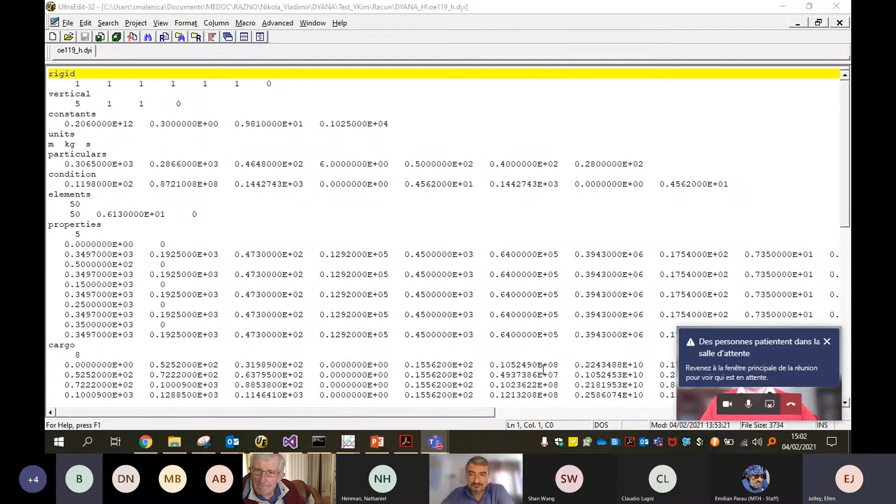Let me introduce our speaker today, Sime Malenica. He has a naval architecture degree from University of Zagreb, and obtained his PhD in hydrodynamics in '94 from Paris 6 University. After graduation he joined Bureau Veritas, a French classification society, where he is still employed. He has been head of the hydrostructure section team in the research department for a long time, and from 2008 he is deputy director of the research department at Bureau Veritas. His main field of research concerns different aspects of fluid structure interaction. He leads several national and international research projects on these topics. He works in both theoretical and practical aspects of ship and offshore hydrodynamics. He has published 150 papers in international scientific journals and specialized conferences. He is associate professor at the Faculty of Mechanical Engineering and Naval Architecture at the University of Zagreb, and from 2016 he is corresponding member of the Croatian Academy of Sciences and Arts. I believe these are great achievements and recognition of Professor Malenica's contribution to the field of research.

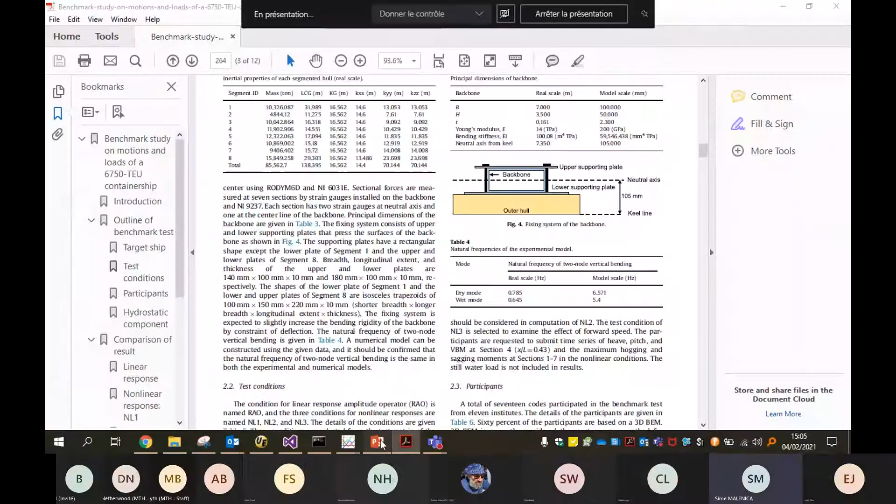But before I switch off my microphone, could you please share your slides? Yes, yes, can you see it? Yes, I see it, perfect. Do you see just the presentation or? No, now I see, the previous one was the right one. Yeah, that one, yes.

Okay, yes please start. Thank you Sasha, thank you for this introduction. I'm glad to be able to speak at this series of seminars. This is work which has quite big practical importance, and it's kind of a starting step toward the solution, hopefully in the near future.

The work was done in collaboration with the University of Zagreb, Bureau Veritas, and University of East Anglia, Professor Korobkin and Tanya. So we all participated in some way.

This is the content of the presentation. I will say first something about why we are doing all this. Then I will briefly present the analytical solution, which was provided by Tanya and Sasha, the definition of the test cases which we chose to work on, describe the numerical approach and the numerical models which were used, and then present and discuss the results.

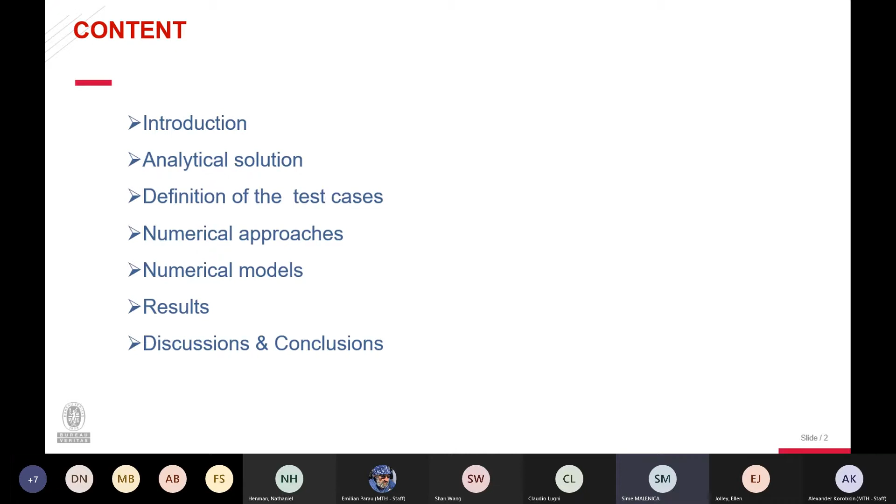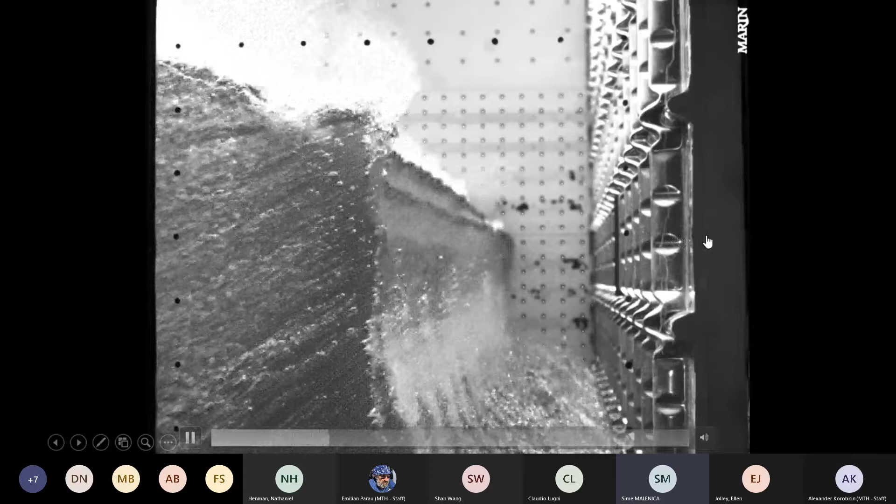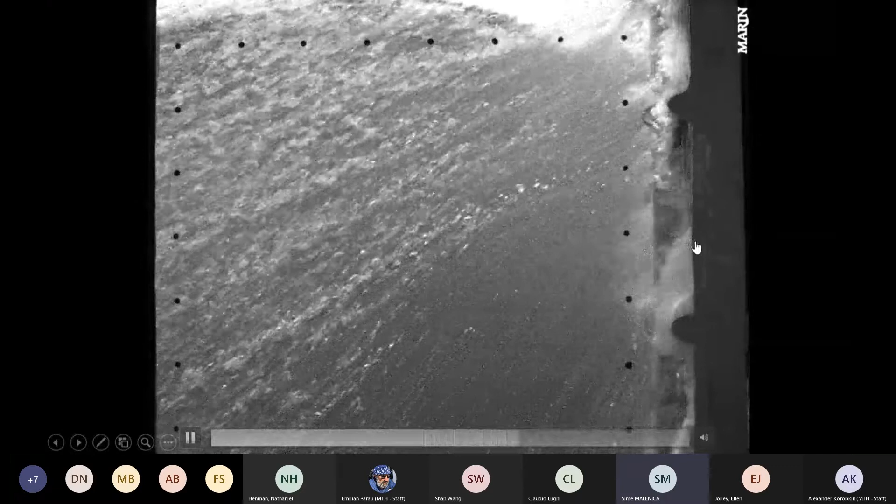This is the context where the work we were doing is meant to be applied. So these are all sorts of impact situations. These are some videos of large-scale tests on sloshing impact on the corrugated containment system. This is just to show how complex the problem is, and what we want to know is the stresses in the structures at the end when these impacts occur.

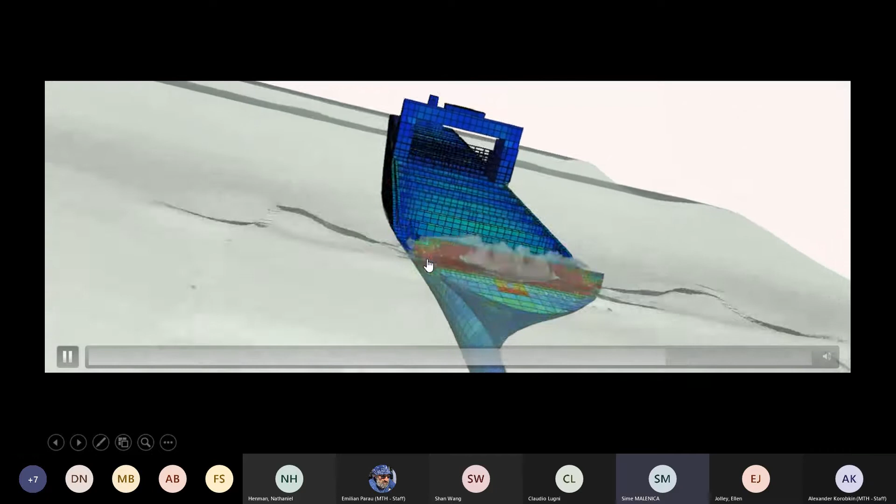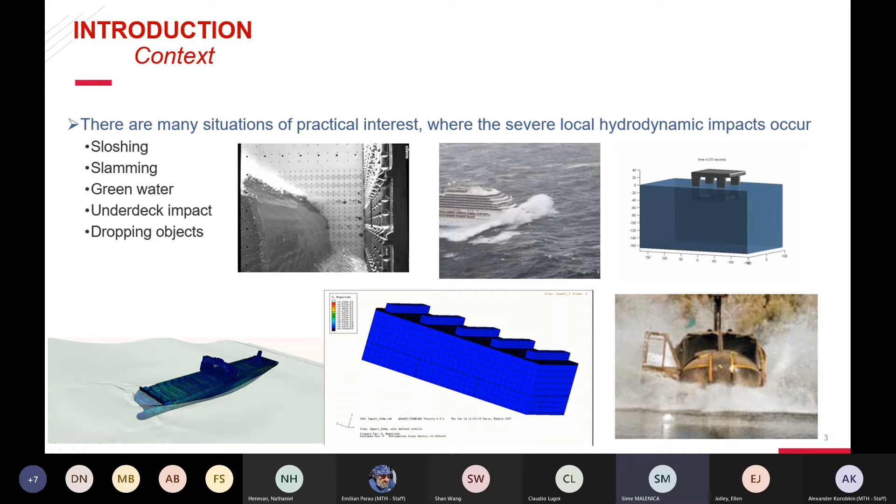Another type of condition where this can happen is what we call green water impact on the deck superstructure. Another type of thing is impact under deck on the semi-submersible, and all sorts of impacts where we have very strong hydrostructural interactions and very large pressure forces exerted on the structure.

Physically the problem is complicated because many physical effects are involved. On the fluid flow side, sometimes we can consider flow as incompressible, sometimes compressible - compressibility can matter. On the structural side, we prefer to work with linear type structural response, but that's not always possible, we should sometimes involve some nonlinear behavior of the structure. On the interaction side between fluid and structure, we have several possibilities: either fully coupled, what we call hydroelastic, which is very complex and we try to avoid it, or quasi-static, or a mix of quasi-static and dynamic, which we call quasi-dynamic, in which we consider just the structural dynamics.

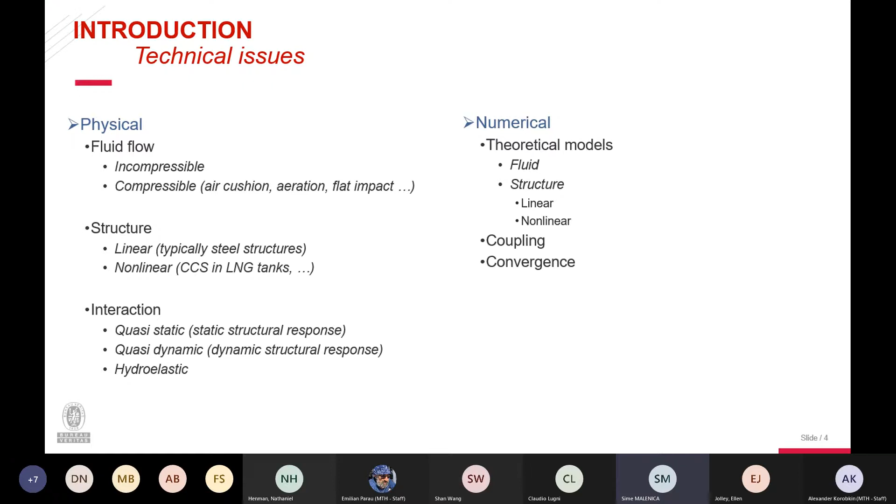On the numerical side, the theoretical models on both sides, fluid and structure, can be very complex, as well as the coupling procedure, which can also be quite complex. And when we talk about the purely numerical method, we have some convergence issues. So the objective of this study was to investigate the possibility of coupling CFD and finite element.

CFD for hydrodynamic loading and finite element code for modeling the structural response. On the hydrodynamic side, we tested several methods, what we call the ghost fluid method or the classical method. We tested the simulation, compressible and incompressible.

On the structural side, we have an in-house beam model, which we call Dyana2, which is used in several ways. That was very helpful because we have full mastery of this software, since it was written in-house.

On the coupling side, we have two types of approaches. One which I call direct, which means at the level of the finite elements, and we have the modal approach, which consists in the coupling through modal superposition. So in all cases, the Dyana2 beam model was used as the structural solver.

But what we should understand is that this coupling is a general coupling, because everything is done so we can easily replace Dyana2 with software like Nastran, Abaqus, or whatever.

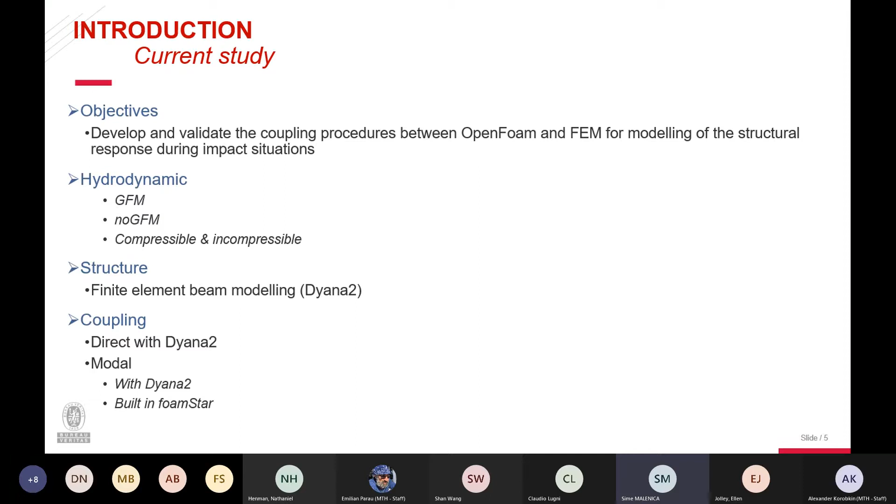So an analytical solution was provided by Tanya Khabakhpasheva and Professor Korobkin. I will just briefly explain what is done there, in order to better understand what we are comparing.

So the coupling is done under Wagner assumptions, and the structural model is the Euler Bernoulli beam with simply supported boundary conditions. The coupling procedure is based on modal decomposition.

What is interesting to say here is that within the approach they use, the pressure is not explicitly evaluated. That means we do not really need to talk about pressure even. But in practice it happens that we talk only about pressures. When hydroelasticity matters, we should not talk that way. That's one of the points we are willing to raise with this work.

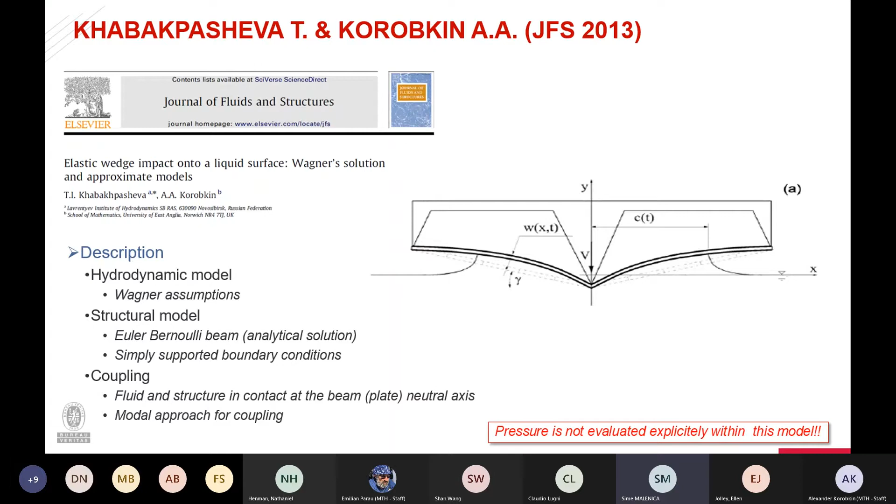So the Wagner model, briefly, is a simplified linearized model in the sense that we linearize the free surface condition, but it is in fact non-linear because the position of the free surface is not known in advance. There is a huge body of theoretical work done in the past by many authors, in particular Sasha.

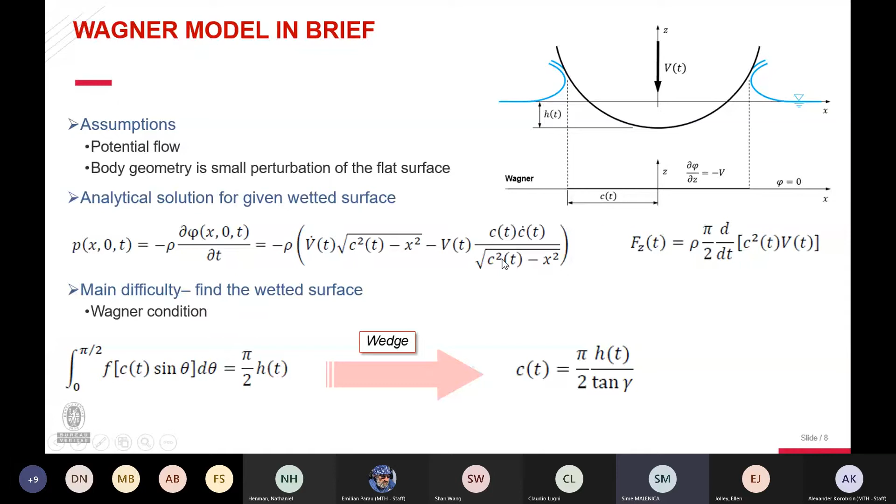And we end up with this kind of expression for pressure, which is singular at the contact point. So we have infinite pressure at the contact point, which is physically not acceptable, of course, but that's the mathematical model. We always have some drawbacks due to the assumptions we made when building the model.

So the maximum pressure can be obtained, and the distribution close to this contact point can be obtained using some quite non-trivial matched asymptotic expansion analysis, which allows you to properly couple the external and internal solutions and give a finite pressure close to this contact point.

So in black line here, we use the solution which was proposed by Professor Faltinsen, and this corrected distribution is shown in black line.

So the red line is something which we would obtain using the pure original Wagner model. So the critical quantity in all this analysis happens to be the velocity of the expansion of the wetted surface, which is denoted here by C dot.

And we can see that maximum pressure is proportional to the square of this velocity, and this expansion velocity is proportional to the impact velocity and inversely proportional to the tangent of the wedge angle, which means as we go closer to flat impact, this pressure can take huge values.

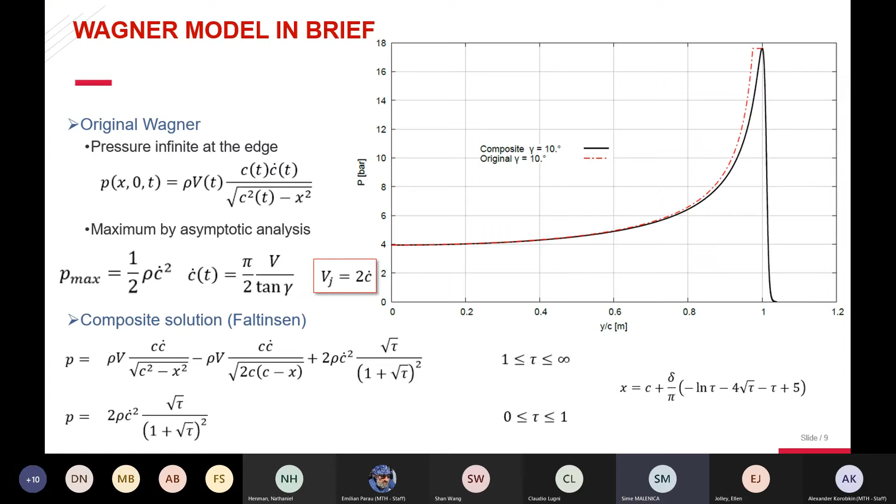But as we will see, this huge value of pressure does not mean that the structural response will be enormous, because this pressure will be absorbed by the dynamics.

So what is important to understand about the Wagner model is that one of the main points of this presentation is that we should not use just maximum pressure as the quantity which is relevant for structural response.

So you can obtain the same maximum pressure with very different impact conditions. You see the impact velocity change from 3 to 17 meters per second, and if you change even slightly the dead rise angle, you can achieve the same maximum pressure but a very different pressure distribution. So what matters for the structural response is the pressure distribution, not just the local maximum pressure.

So you can see this, what I note: WQS is the quasi-static structural response, meaning just applying this pressure on the finite element model. You can see that the response can be very, very much different for the same maximum pressure, meaning that knowing the maximum pressure is not enough.

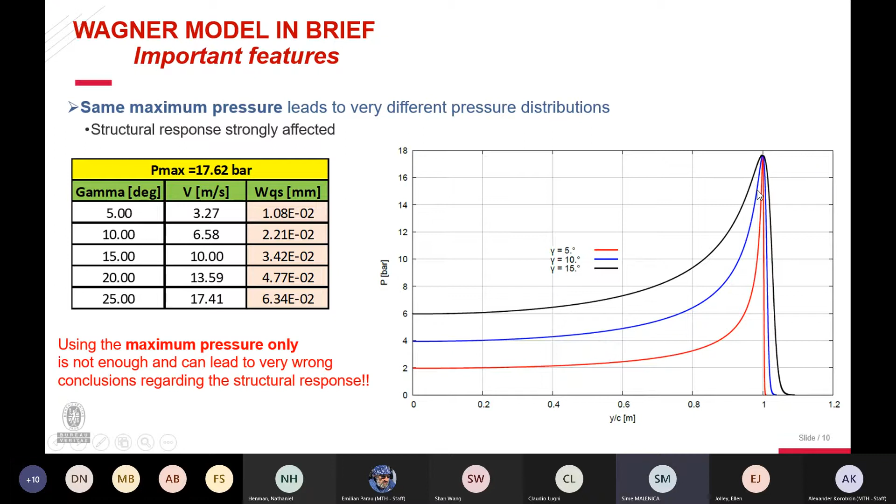What is also important to understand is that if you have one constant velocity and you slightly change the impact conditions, meaning the angle, your pressure changes dramatically, as well as the quasi-static structure response. So using the impact velocity only, we cannot correctly assess the structure response.

What we are interested in at the end is the structure response. The pressure itself is not so much interesting. It's good to know that it is sharp, but at the end what we are interested in is the structure response.

So this type of pressure, even if this is an analytical model, we can say it is just a model. But when you do model tests in practice for very small dead-rise angle, you can obtain extremely large pressures. There was a good paper by Faltinsen in which he showed that even slightly changing the impact conditions, you can have pressures locally up to 50, 100 bars. That's what we measure. But the point is that the pressure is not the only quantity we should look at.

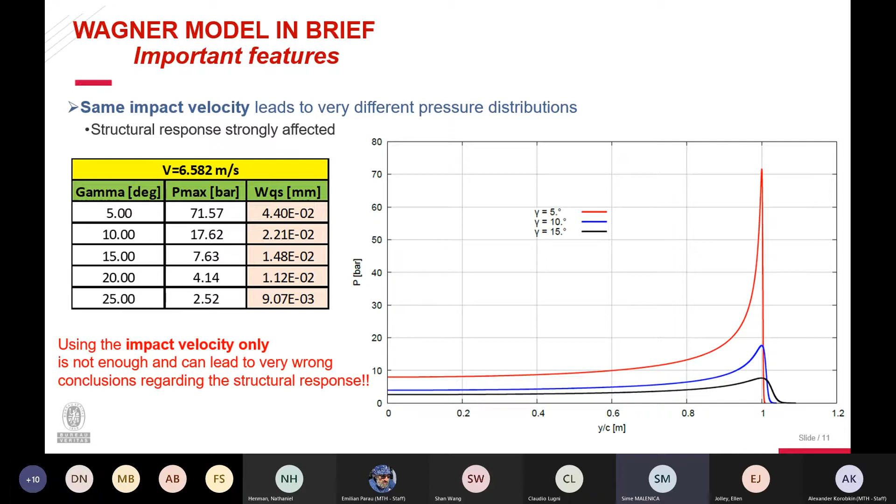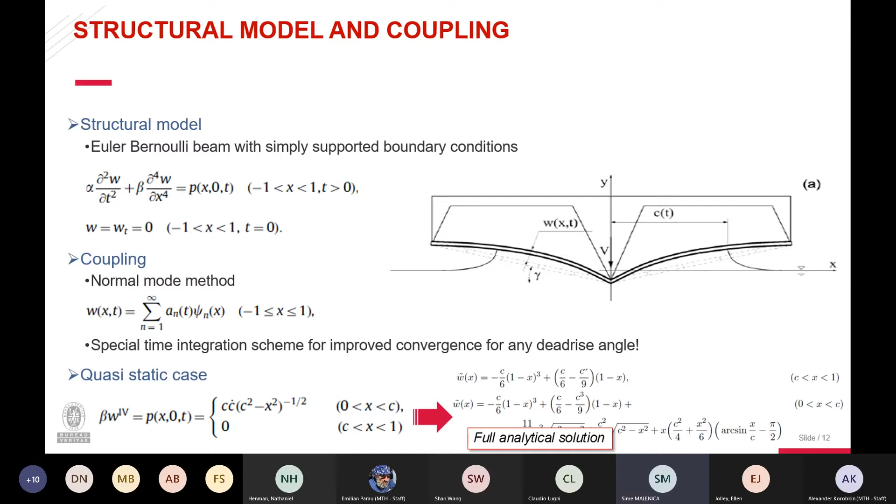So this is the principle of the coupling method which Tanya and Sasha used. I will not spend too much time on this. It's a full analytical solution based on normal mode method, so it's very fast converging and there are no numerical issues. Everything is properly calculated within the theory which we adopted at the beginning.

So what we did in this study, the question we asked ourselves is: can we use a purely numerical approach, which in our case means foamStar or OpenFoam and finite element coupling, to model this kind of situation? Why do we do this? Because in practice, when we have impacts, as I showed in the introduction, we never have a kind of very clean academic wedge impact problem. It's always something much more complex.

And when the geometry of impact and conditions become complex, we can no longer reasonably use the simple analytical approach. So we have to deal with more complex numerical methods, like this CFD method based on OpenFoam. It's more costly, of course, than the analytical approach: analytical takes a few milliseconds, and CFD takes a few hours. But we have no choice, that's the point.

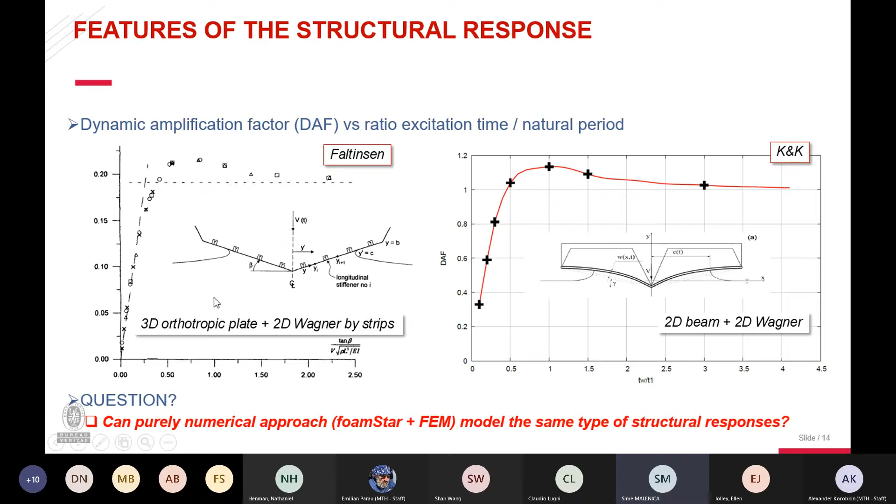What is important to understand is that we have three different regimes for which we need to do the simulations. And these regimes are, from a numerical point of view, very much different. So a different strategy of coupling should be used.

So this is the dynamic amplification curve, where we identified three typical regimes: the impulsive response, when very short — on the horizontal axis there is the ratio between the duration of the loading and the natural period. So for a very short duration of the loading, we have impulsive response. When the duration of the loading is comparable to the natural period, we have dynamic amplification.

And where the loading is quite slow, we have quasi-static response, which is the response we would like, and in practice we would like to use most often because it's the simplest one. In this quasi-static approach, you can simply calculate the pressure and apply it on the structure, and you will have good results. However, for these impact problems, as we will see, these dynamic and impulsive regimes are more relevant.

So how to choose these calculation points? We use this analytical solution to choose the calculation points for the numerical analysis. We have chosen the plating which is physically close to the plating of the one container ship on which we had some problems. These are the characteristics of the steel: the length of the plate is 0.8 meter, and then by playing with the different impact conditions, we can identify different regimes and place ourselves at different points on this curve.

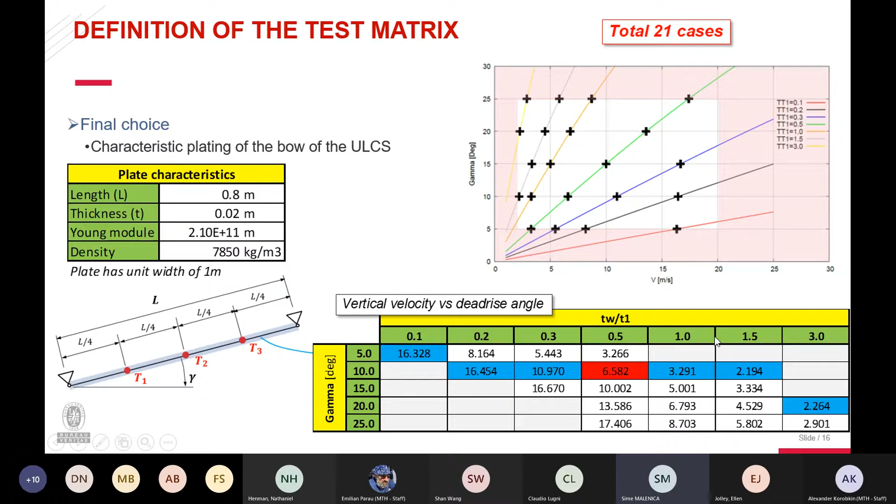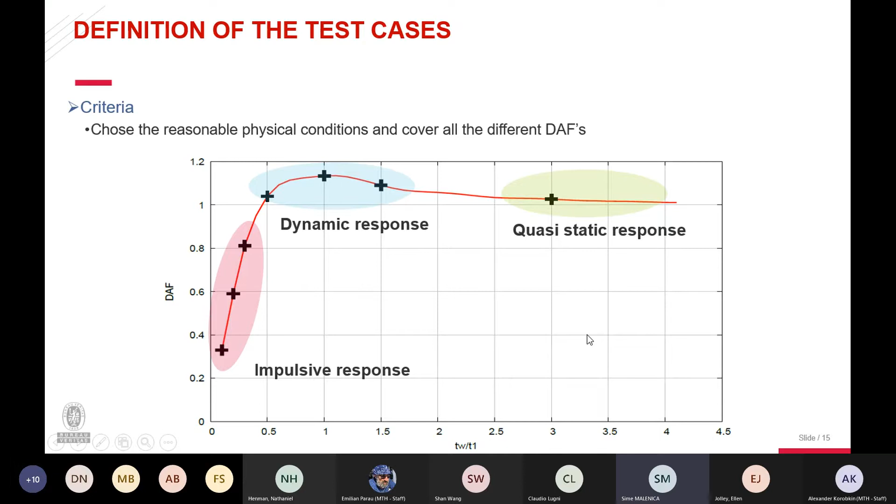You see here 0.1, 0.2, 0.3, 0.5, 1, 1.5, and 3 — these are the points on the horizontal axis. When we have 0.1, we are close to the impulsive response. When it's 1, it is dynamic, and when it's larger than 2 or 3, it is quasi-static.

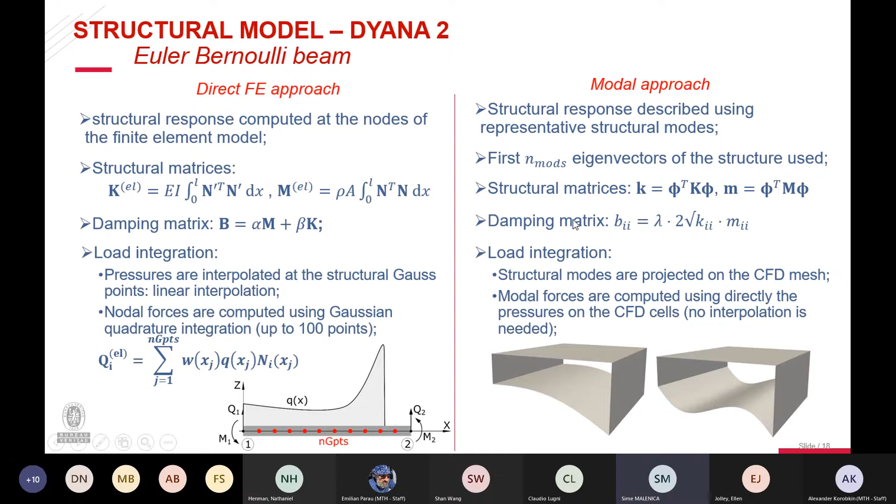On the numerical side, we used a structural model based on the Euler Bernoulli beam, which was recently revisited and redeveloped, so that we have something to play with, where we can change every detail of the modeling and properly extract any information we need — both for the direct finite element approach and at the level of the modes. It's classical dynamic structural analysis, but fully mastered by our team.

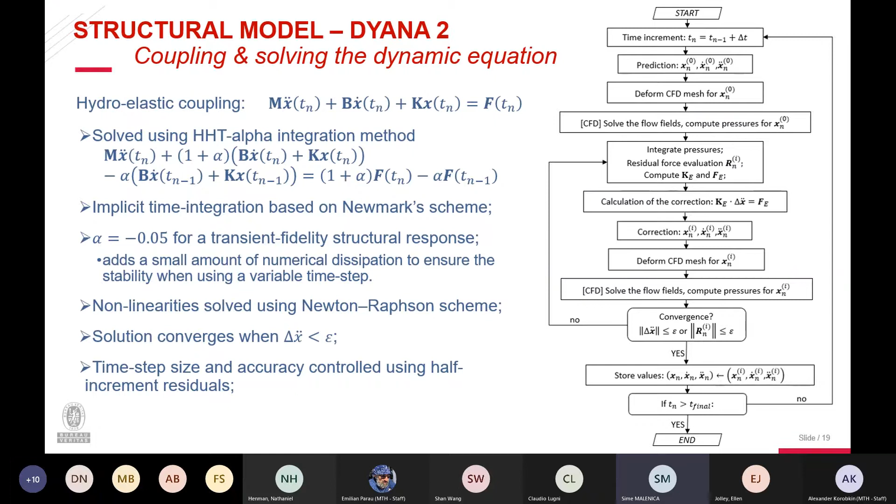Once you have your structural model correctly mastered, you need to interact with the loadings on the loading side. A quite general interaction scheme was built by my colleague and postdoc from University of Zagreb, in which the interaction between the structure response and the dynamic loading was done through an iteration procedure, which converges properly. Most often, in some cases, we need to adjust some things — it depends on which regime we are placed in.

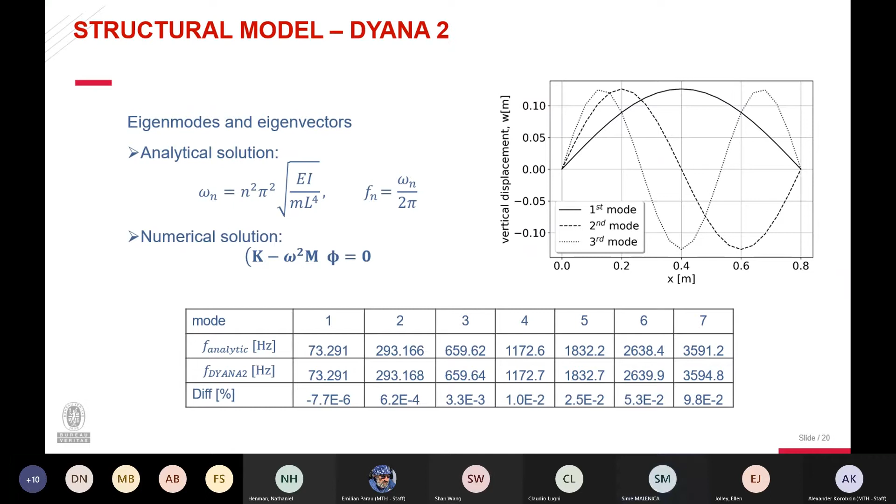So these are the natural modes and the characteristics of the finite elements — nothing special, that's what we have as a result of the structural analysis. This can also be analytical, but we did it on purpose using the numerical solution, because our objective is to couple later on this OpenFoam and classical generic structural software like Nastran, Abaqus, or whatever.

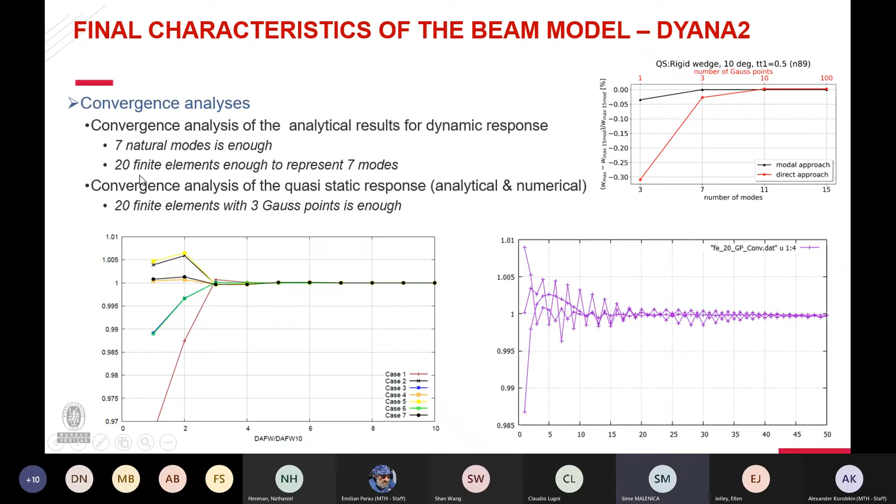Before choosing the characteristics of the structural model, we did some analysis on the convergence of the response based on the number of elements and the number of mode shapes, just to be sure that our structural response will converge at the end. So at the end, we chose 20 finite elements along the beam for the direct coupling, and we used 7 natural modes for the modal coupling. So this is a few details about FoamStar.

Those who know me know that I'm not an expert in CFD, but I understand that we have no choice in some situations — we have to do the CFD. There are some experts on CFD who have quite different views on the different strategies employed when you need to capture the free surface. That's one of the main problems, not only in CFD but in general in dynamics.

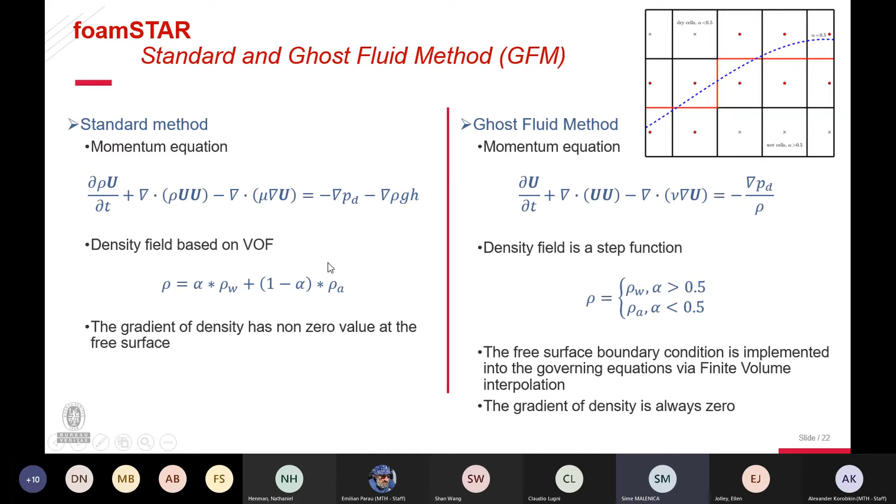There are two methods: the standard method, available in classical OpenFoam, and the newly developed ghost fluid method, developed at University of Zagreb and implemented by Ino within this work. I will not say too much about the details because I don't really fully understand them, but just to say there are different strategies.

These are the meshes on which we also did a convergence study. In CFD, it is fundamental to do the convergence study, because otherwise you cannot trust the results at the end. So we did several meshes — N64, 89, 133, 200, and 300, meaning the number of cells along the wedge. This is just to show the mesh.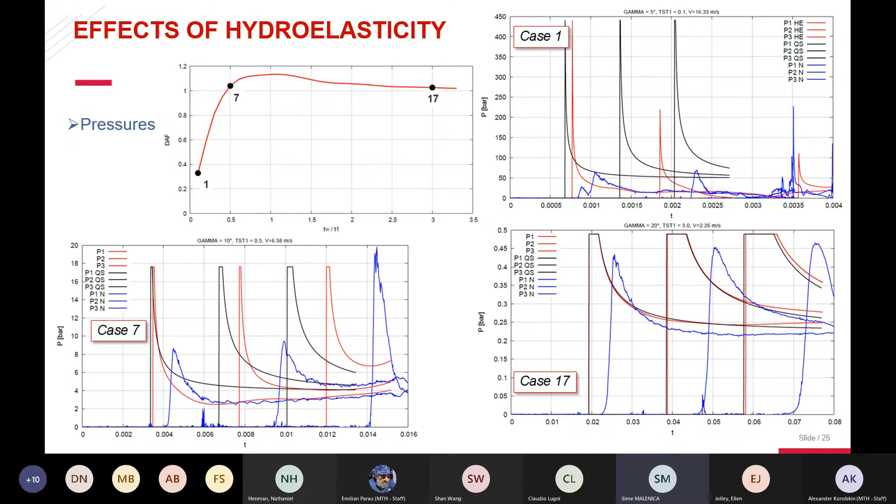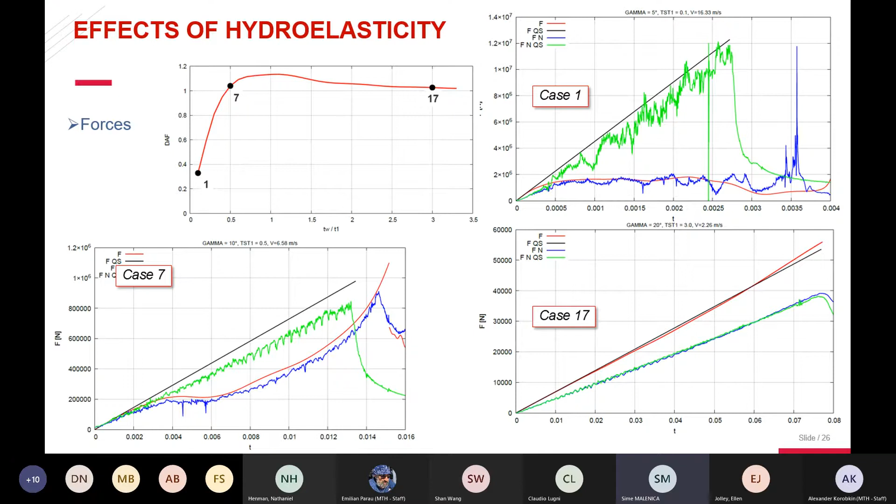So the comparisons between analytical and numerical results are on this graph. It's good to see that even for small dead-rise angle, the CFD obtains quite reasonable results, even if they need to be filtered at the end, because there is quite a lot of oscillation in terms of the CFD loading and the response.

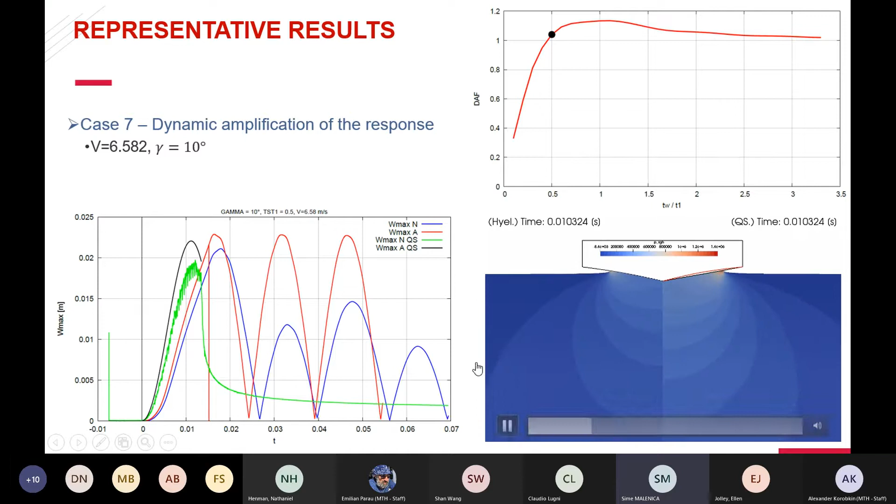So this is the case where you have the kind of dynamic amplification. In this case, we need to take into account the dynamic amplification, but the difference between quasi-static and dynamic is not so huge. These dynamic amplifications go up to 1.15 or 1.18, which is not huge. If we use quasi-static simulation here, we will miss maybe 20% of the response.

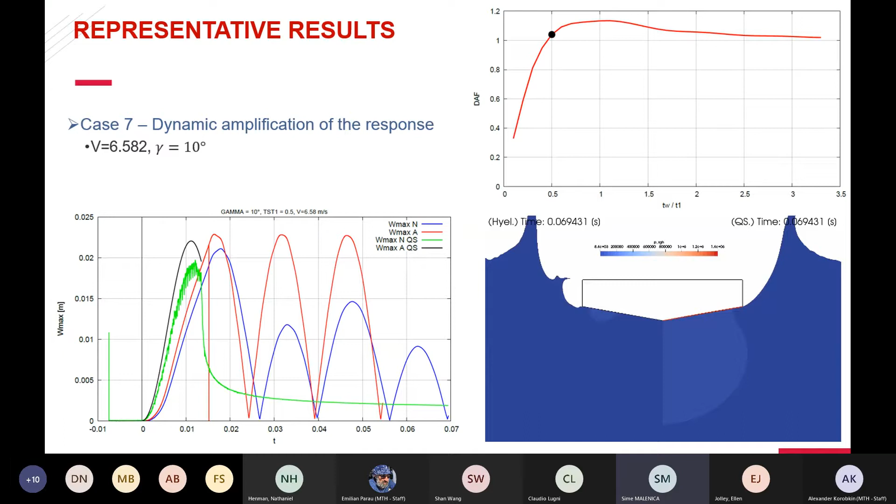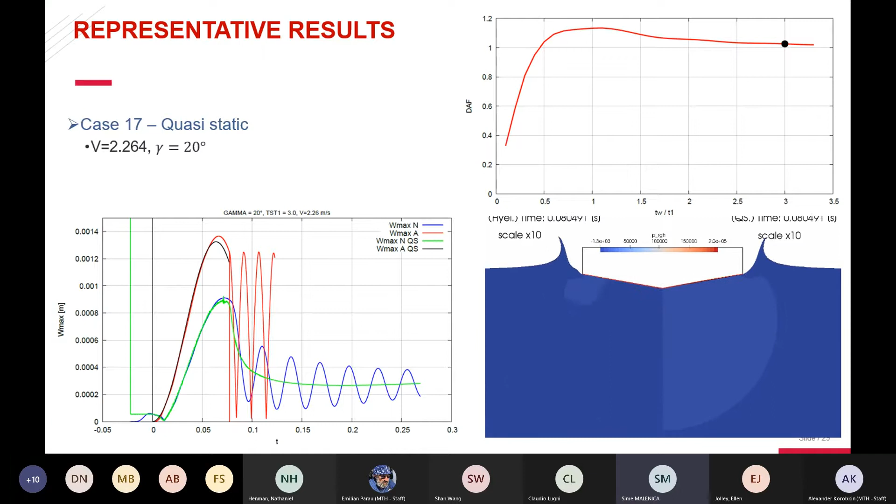This is the summary of all 21 cases and all types of simulations we did. Without going much into the details, the idea is to show that using the hydroelastic coupling method between the purely numerical CFD method and the structural finite element method, we can properly capture this dynamic amplification curve.

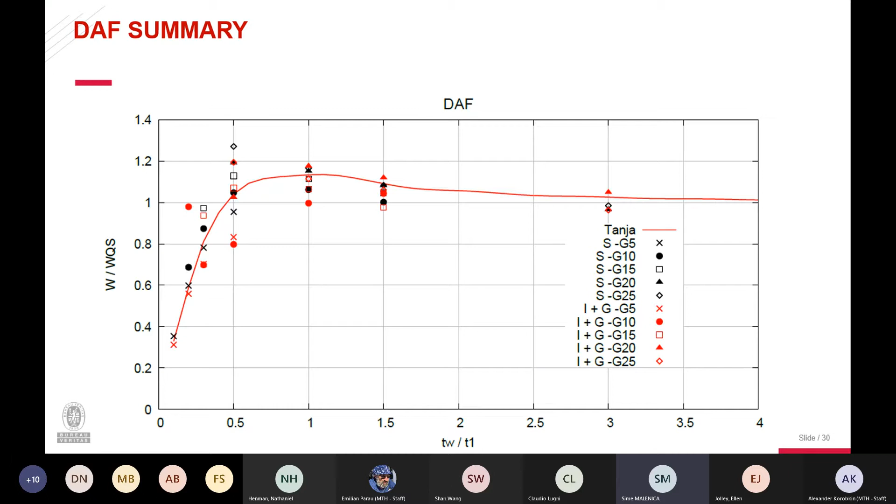Of course, this is the dynamic amplification factor, so we cannot say the results are... it's difficult to validate the results compared to the Wagner approach, because the Wagner approach is too idealized. But it is good to know that the CFD properly captures all these different regimes in terms of this dynamic amplification. So the total response, which is something we are interested in at the end, compared to analytical and numerical, is reasonably close. The dynamic amplification, of course, cannot be perfect, because we are dividing things which are not the same.

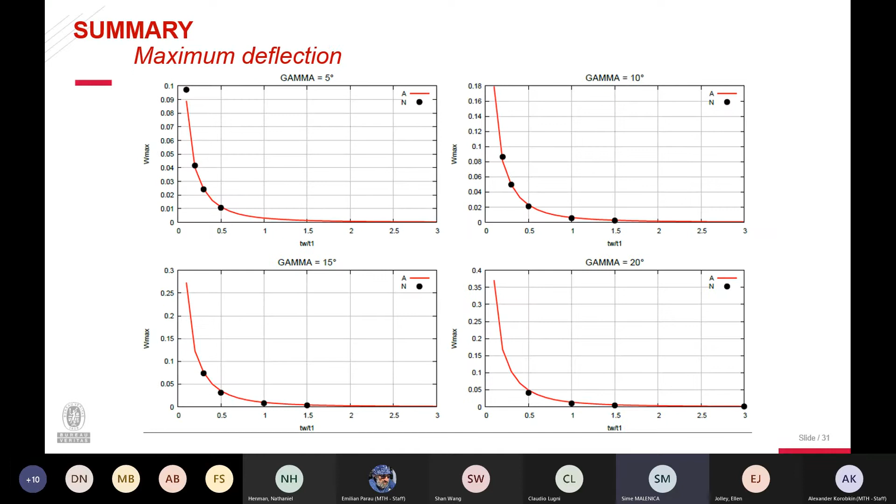But the good point is that using the purely numerical method, we are able to reproduce the total response properly. This is in terms of the deflection, and this is in terms of the strain, which is the second derivative of the deflection. That's actually the presentation of the results and the methods.

So these are the conclusions and some discussions. It is good to see that pure CFD and finite element method coupling can simulate all the different hydro-structure interaction regimes. There were quite some problems when we started this work, and some convergence issues, but when you fine-tune your model, you are able to do it properly.

So the difference in the pressures at the end, which were quite huge especially for impulsive conditions, where differences were very big, does not matter in terms of structural response. That was one of the goals of this study, to show that the maximum pressure does not matter.

So modal and direct approach show sensibly the same results, which is also good. That means... because one of the goals is to use this direct approach to study nonlinear structure response. The modal approach can only be used if your structure response is supposed to be linear, while the direct approach can be used for any type of simulation.

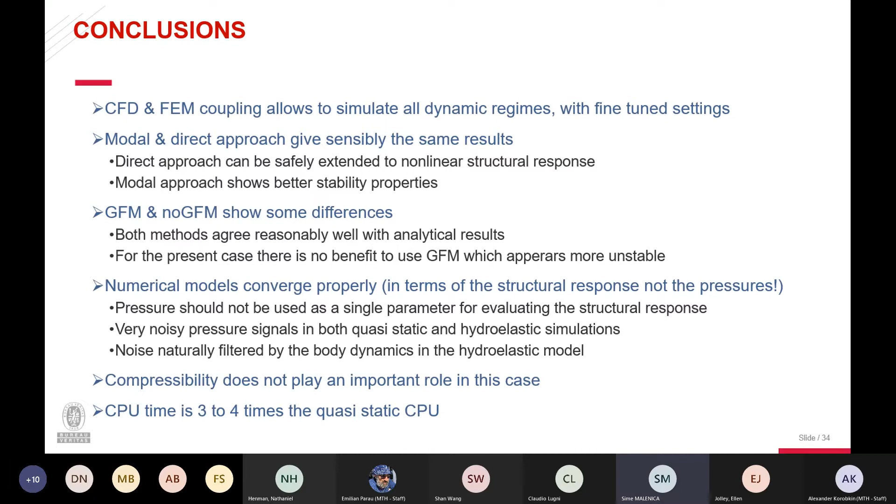So this is about, I think I will stop. This is one, just one comment. Sometimes due to the difficulties of coupling the loading and the response side, there are some methods which are proposed sometimes in the literature, which is based on the so-called quasi-dynamic approach.

Quasi-dynamic approach, what does that mean? That means that we pre-calculate the loading, meaning the pressure distribution over the wedge, and we calculate the dynamic response of the structure as a quasi-static structural dynamic response, but without taking into account the interaction, which means basically that we do not account for the effect of added mass.

So in the cases where the added mass is not important, this quasi-dynamic and full dynamic approach can give similar results. But in this present case, where the added mass is much bigger than the genuine mass of the structure, the results are completely different, which means that we cannot use this quasi-dynamic approach in this particular case.

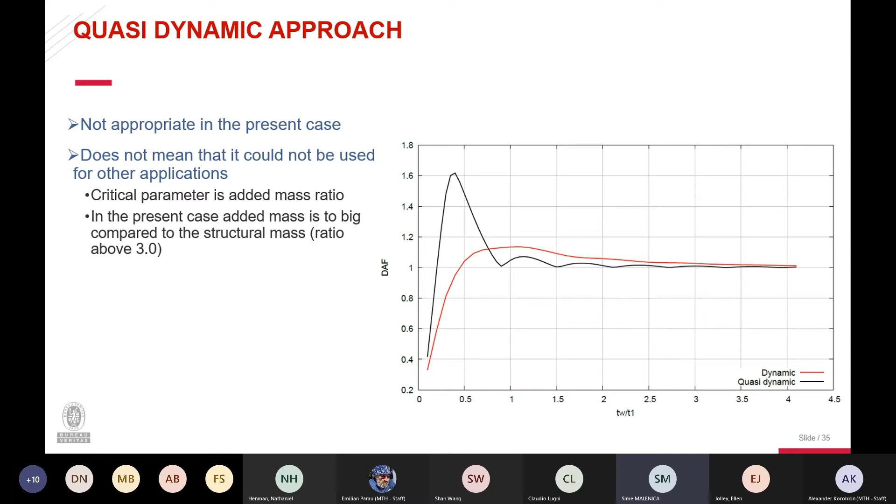Okay, so this is my presentation. I think I remain within the time. Sasha? Yes, thank you. If you have any question, please feel free to ask, and comment, whatever. Yes, we have enough time for questions.

Thank you very much. It's a very good presentation, very clear, and also the practical side is shown, which is a little bit more in particular. It's important for us that we understand what we are doing in terms of our research, because in mathematical research, we write an equation, do simple calculations, and make more or less reasonable figures or pictures, but then it's a big problem what it means for real life.

So yes, that is doing these seminars and cooperating with the people who are doing practical work. It's important for us to understand actually what we are doing, in that sense, yeah.

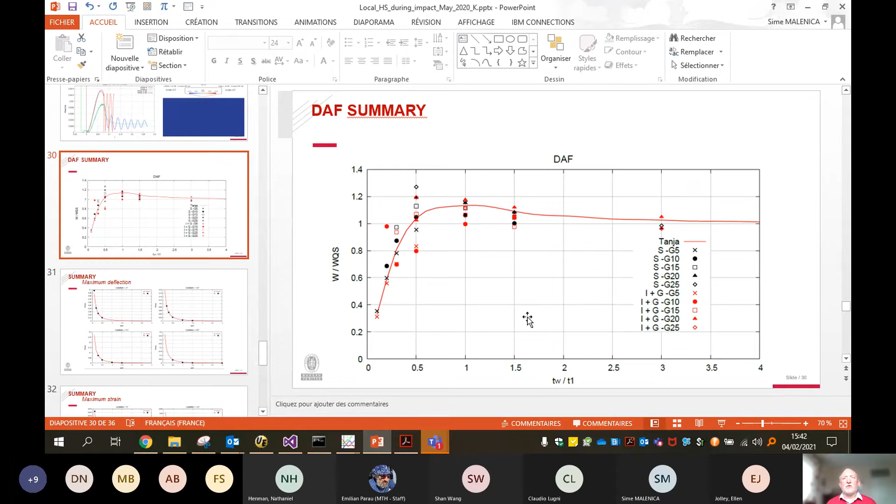So I'm using my, say, privilege. In some sense it's not privilege, but kind of privilege to ask the first questions, and then the floor will be open for other questions. First of all, it's about the dynamic amplification factor. How is it defined? I understand it can be defined differently, as a ratio of maximum stresses or a ratio of maximum deflections. And what does it mean with respect to quasi-static response, right? So what does quasi-static mean? Because as you showed in slide 35, quasi-static can also be understood differently.

Yes, please. The quasi-static response is obtained when you simply calculate the pressure as if the body was rigid, apply it on the structure, and calculate the response. There is no dynamics, no dynamics of the structure at all, and that's the reference quasi-static result. And hydroelastic response is the full interaction, as in your analytical work or equivalently in this numerical work.

And the final results, when you do coupled and uncoupled, quasi-static and hydroelastic, you obtain structure response in terms of deflections, stress, or whatever. So what I showed was the dynamic amplification factor defined as the ratio between the deflection, dynamic and quasi-static, but also strain. Both are very similar, because the strain is a second derivative of the deflection, and in some sense the behavior of the dynamic amplification is similar. I would say not exactly the same, but similar.

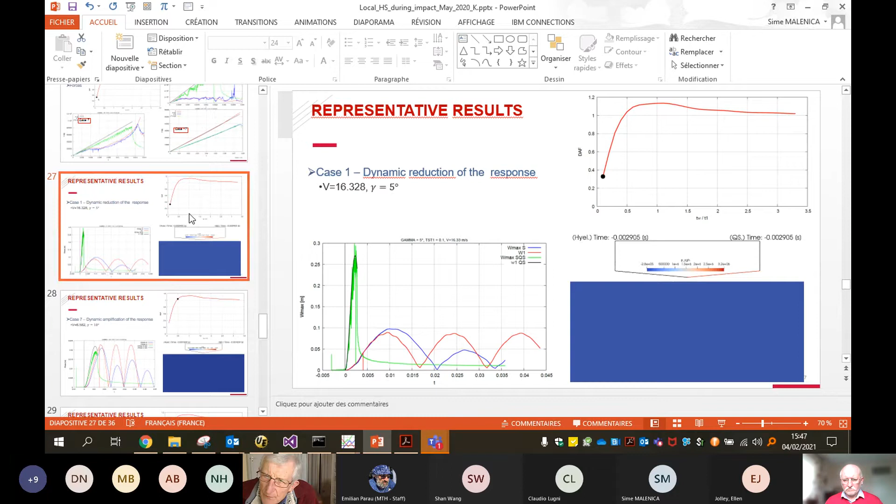But we have seen that such a fine mesh is not necessary. I have some other slides which I didn't show, that it is not necessary to have such a fine mesh, but we needed to do it to check the convergence. So at the end, I think we were working with even 64 elements per wedge length, which is enough in terms of the structural response. The pressure peaks are completely different from one mesh to the other.

Because the more you refine, I think in CFD the more the pressure becomes big. But in this case it doesn't really matter - for some cases you will never converge in terms of pressure, but it doesn't matter. That's the point, that's the kind of message I was trying to give. Yes, some sort of integral property - integral in time and in space.

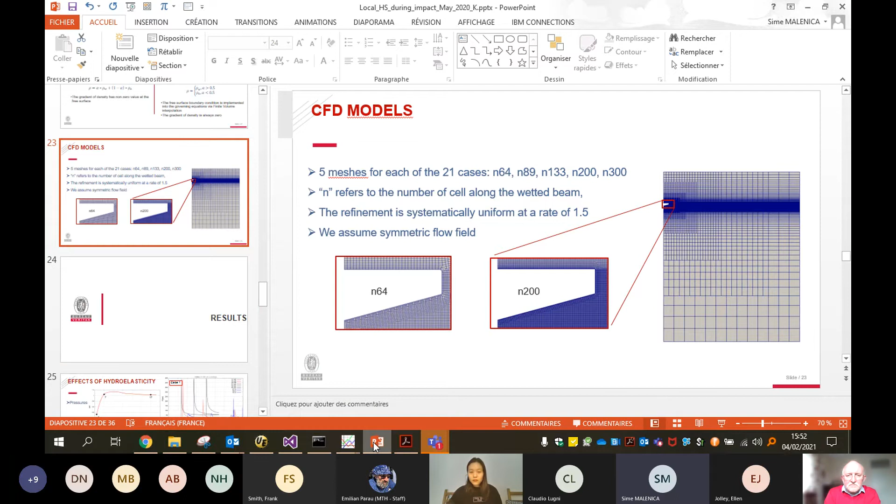So the first question is how the OpenFoam CFD simulation was coupled with finite element modeling. Yes, that's a big part of the work was dedicated to that. So this is the coupling scheme which is shown. There is an iteration procedure. You deform in order to properly capture this added mass effect, you need to deform your mesh.

Consistently at each time step and to resolve your coupling motion equation in this way. I mean there is an iterative procedure at each time step. And in details, I know there are a lot of details, but did you develop a finite element code in the source of OpenFoam, or did you couple two different solvers?

In this particular case, we coupled two different solvers. So the finite element solver is Dyana 2, right? Yes. The finite element solvers are connected, are coupled with OpenFoam, yeah. It's coupled through the interface files. There is no full integration of one software into another.

That's what is planned to be done in the future because it will be much more efficient. In this case, efficiency was not the first objective. The objective was to show that we can do it.

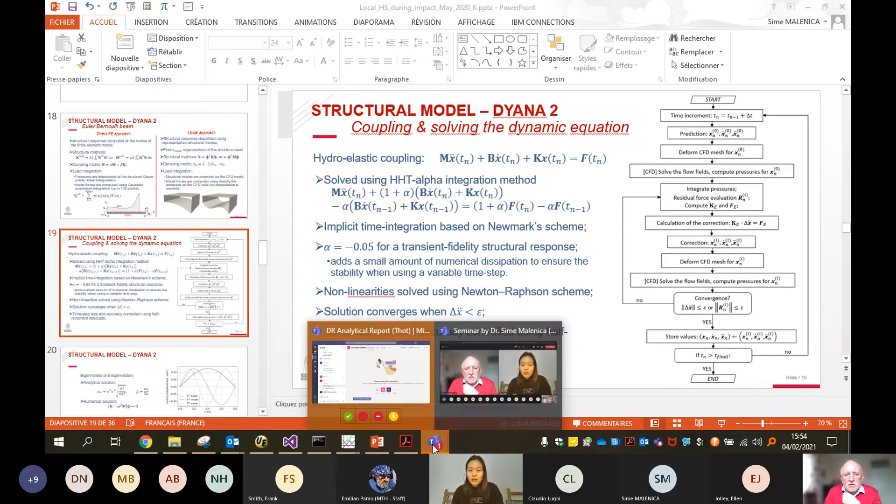Okay, and how about the consistency of the mesh in different solvers? Is the mesh resolution in OpenFoam the same as the one in the finite element modeling? The mesh resolution in CFD in OpenFoam is much finer than in the finite element model. So in the finite element model, I said there are 20 finite elements, but on the CFD side, we have between 60 and 300 elements. This is necessary to properly load each finite element.

When you use the modal approach, you can live with maybe fewer elements, but when you use the direct approach, you need to have at least several CFD meshes over one finite element.

Okay, because I'm also using OpenFoam for water entry problems, and every time I submit my paper to a journal, the reviewer always requests a finer mesh to get the maximum pressure. So in your presentation, you mentioned that the maximum pressure is not important. Does this mean that we can apply a coarser mesh in this coupling? If it's not important, why don't we just use a coarse mesh in CFD to save a lot of computational time?

Yes. If you use full coupling, then you can afford using the coarser mesh because this high pressure will be filtered by the structural dynamics. But if you use the quasi-static approach, then it's not good, because your structure response is directly proportional to the pressure. So your result will be wrong. If you use full coupling, then you don't really care, in some sense, about the resolution, because whatever small errors there are, they will be filtered by the structure.

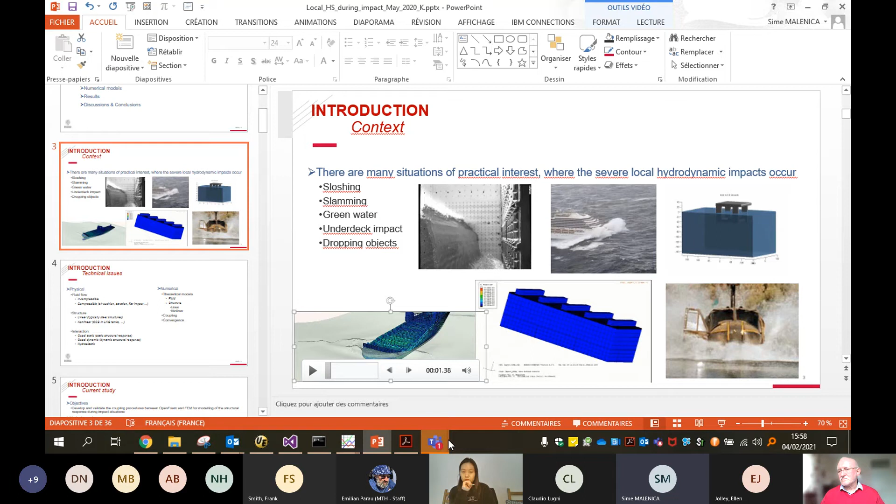You cannot approximate it by the wedge impact, so you need to use CFD. You cannot have analytical results for these complex geometries. So the idea is to validate CFD on simple geometry and then use it for very general geometries. We cannot straightforwardly use CFD without validating it for these different regimes: impulsive, dynamic, and quasi-static. Once we validate them and understand what is important in this coupling, we can safely use it for general applications. That was the idea.

It's just a comment. Thank you very much, and your question is a little bit of a philosophical question about how to do research and the relation between theoretical research, computations, and even experiments.

I remember Mirek Kaminski used analytical solutions to calibrate his pressure gauges. That is strange, right? But in some ideal conditions, which can be reproduced numerically or experimentally, we believe, and it's happening, that the theoretical models work fine, but not always.

We need to know what function is played by theoretical models or simplified models, and what the computational models are doing. There are reports from BV about a kind of methodology for using CFD: cover the whole field with simple but more or less reliable computation, identify the hotspots, and then go there with CFD and more detailed analysis.

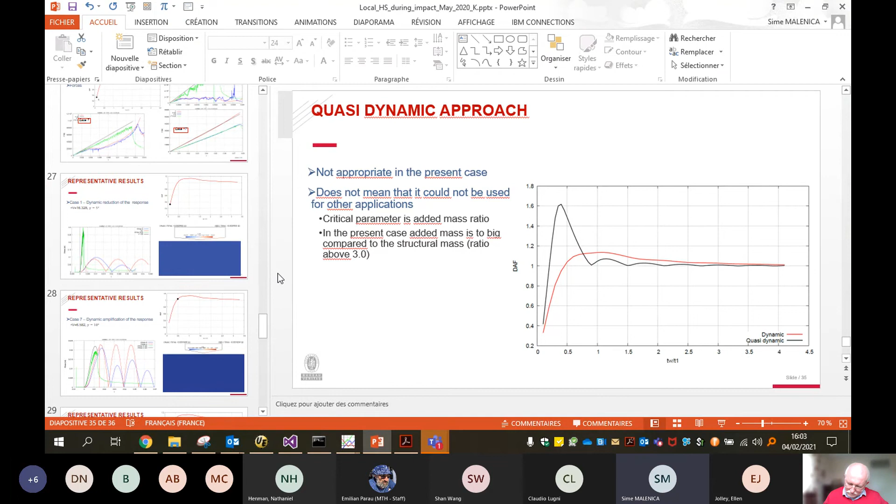But once you have your method which correctly takes this into account, then you don't care — the added mass is automatically taken into account together with the fact that it changes in time. What I would stress is that this probably depends on good accuracy in the hydrodynamic solver. I mean on both of them, because they are coupled.

But anyway, yes, the hydrodynamic solver must be probably... And then the second question concerns the big problem about repeatability. This is particularly true during the experiments - the repeatability of the experiments - and usually the dispersion in the measurement data is really high.

This is definitely true. Probably it's impossible, at least in my experience, to measure the pressure in a proper way. But from our experience, it's also quite large - much less, but in any case as an absolute value it's quite large also in the structural response of the body. I'm also in the advisory committee of another project in Norway, and there too they observed that the structural response has a quite large dispersion in the data measurement.